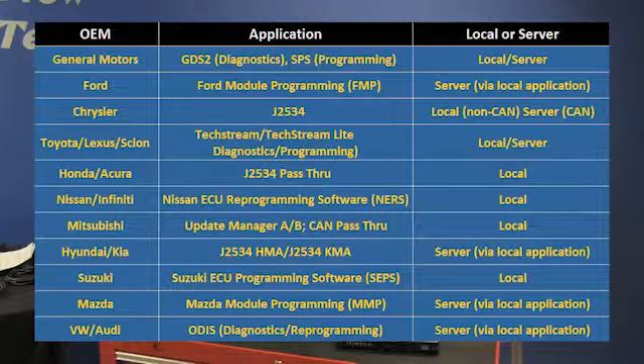So the third part of that would be the J2534 device itself. There are a number of manufacturers out there manufacturing J2534 devices. You'll want to check with the OEM websites to make sure that the device you have has been validated for that manufacturer. And the fourth component for this would be a programming power supply.

It is highly recommended you have a power supply that is specifically designed for ECU programming. The voltages on Asian and domestic cars should be between 13 and 14 volts. And these power supplies are fixed amperages because a lot of times when you're programming vehicles, cooling fans will be running or things will turn on and off. Some of the programming times can be 30 to 45 minutes. You will not have enough battery voltage without a programming power supply, and you don't want to use a battery charger because of the way they cycle.

As mentioned in a previous segment, J2534 has really been an evolution. The original implementation of J2534 was designed for powertrain control module reprogramming. The legislation and the implementation of it starts with model year 2004. So in theory, you could take an off-the-shelf J2534-1 device and using the manufacturer's programming application, reprogram any powertrain control module in the field from model year 2004 and forward. Some of the OEMs have gone backwards, so in a number of cases you can go all the way back to model year 1996.

Many of the manufacturers have now started to add additional protocols, which is where J2534-2 comes into play. The -1 standard includes all of the generic OBD2 protocols, whereas when we get into -2, the manufacturers decided to add additional protocols that were not part of that original standard. What that gives you the ability to do then is to get onto additional networks on the vehicle to be able not only to do programming, but also diagnostic scan tool access. Some examples of -2 protocols that were added would be GM's UART, single wire CAN, Honda's Diag-H. So the -2 standard continues to evolve as OEMs add protocols to that SAE definition.

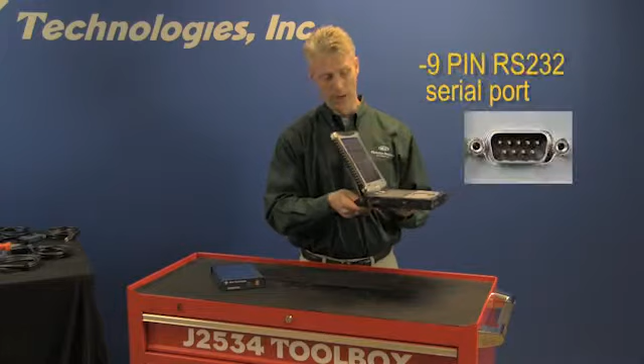I also recommend if you're going to purchase a laptop that you get one with a 9-pin serial connection. The 9-pin serial connection will be used on some of the devices like a Tech 2 if you're going to be programming older GM applications.

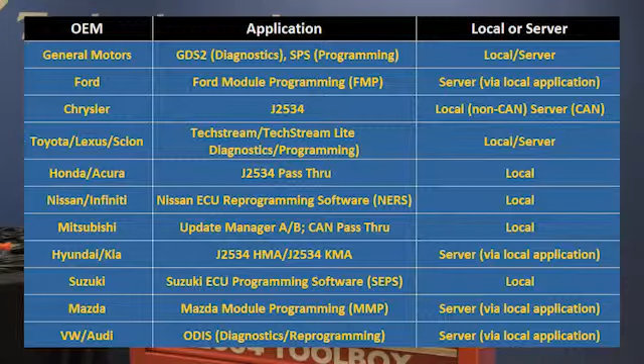So now we're going to move to software. So as you can see in the chart here, some of the software subscriptions from the OEM are server-based, and what that means is the calibration file itself is coming from the manufacturer's server, being downloaded through the internet connection, through the laptop, through the programming device, and into the vehicle. The advantage of the server-based applications is you're always getting the current versions of software.

Some of the challenges with server-based applications, and I'll use GM Service Programming as an example and Chrysler's Tech Authority website, is they're running a program called Java, and Java requirements really have you making sure that you have the latest version of Java running at all times. You'll get warning messages that you don't have the latest versions of Java, and depending what version you're using, you'll also find that sometimes the programming application won't even run because your Java version is out of date.

So when you're using the server-based applications, there are also normally some things you'll have to do on the PC side to make sure the application runs correctly. So in this example here, we have GM Service Programming site up. If we were to select the service programming icon right here, we would launch the programming application. This connects directly to GM server. The application will go through the device, pull the VIN from the vehicle, and all the communication then is a direct link through the PC, through the device, through the car.

There are many applications, however, that are not server-based, and the example I'm going to use here is Honda's pass-through software. Honda's pass-through software is a local application. Now, it's very important on Honda's application, on Nissan's application, on the local applications that you're running the latest versions. They'll always give you a version date and a version number on there.

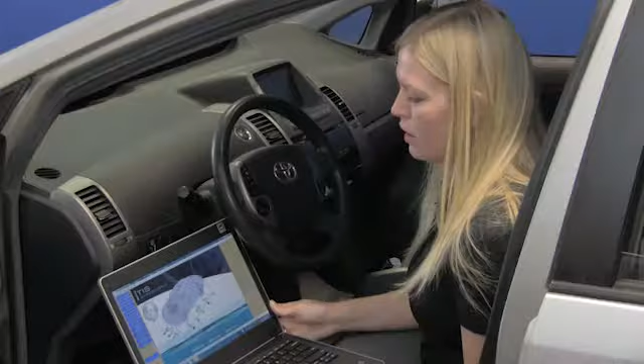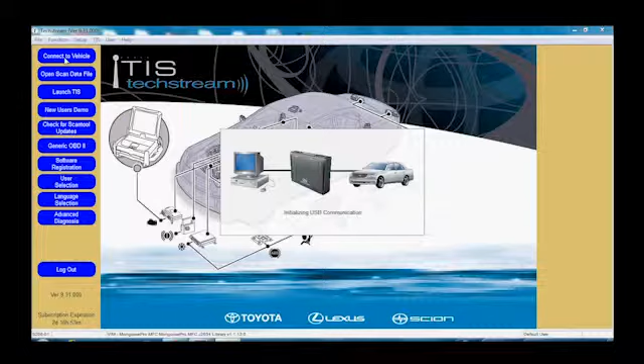Now I'll be demonstrating to you TechStream software using the TechStream Lite function. The software is the exact same on this PC as it is if you were to buy a TechStream unit itself. So what we're going to do first is connect to the vehicle. And right now, TechStream is communicating with the ECU to determine if it can communicate with the vehicle. And we can see here that it was successful in the first communication step. It has the vehicle information and the VIN number.

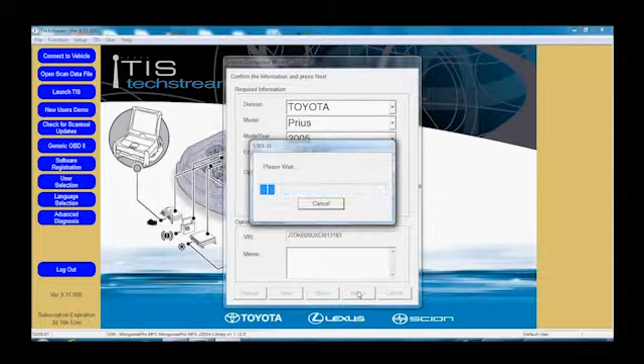It has one option that it can't determine. In this case, this vehicle has Smart Key, so we would select Smart Key, and then we'll click Next. Now, TechStream is determining all the possible ECUs for this model. We can see all the possible ECUs are here in yellow. We don't know if they're communicating or not. Their status is unknown. So in order to find that out, we'll do a health check.

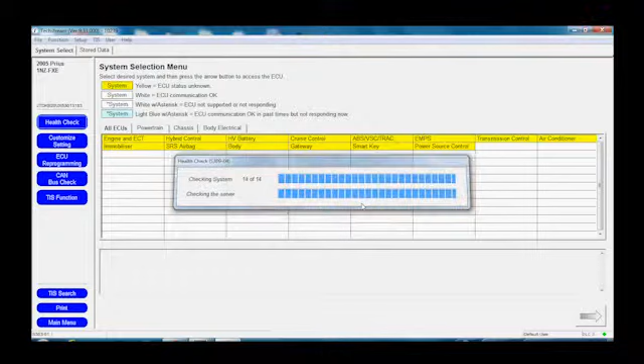TechStream is going to see which of these 14 ECUs it can try and communicate with. So our health check is complete. And here on the health check screen, we can see all of the vehicle systems. In this case, we have a couple of DTCs set in the ABS, VSC, and TRAC ECU, and in the air conditioner ECU, and we can see that they are current DTCs.

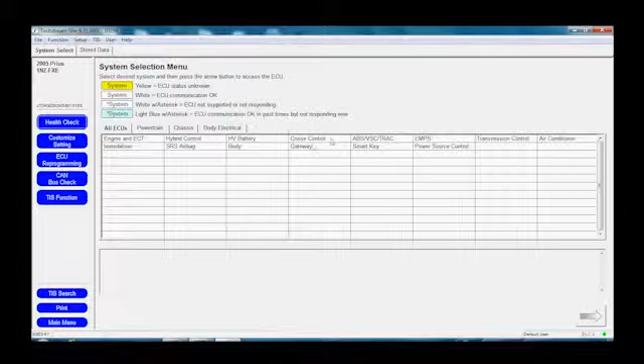We'll go back to our system select, and you can see now that there's no more yellow on any of these ECUs. This vehicle has all these ECUs and they are communicating. We can go into the engine and ECT ECU. And you can see we have no DTCs set, but there's a few functions that we can look at.

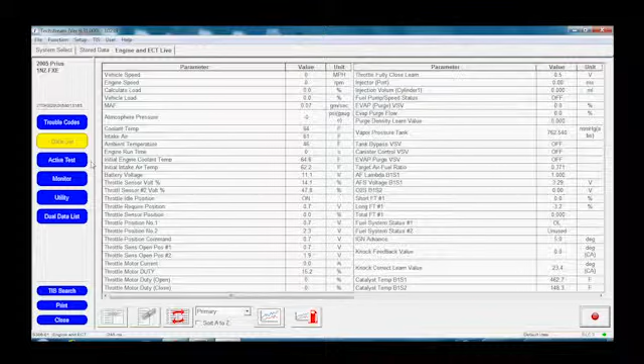We can look at the data list, which shows all of the live data of the vehicle. Vehicle speed is 0 because we're not moving anywhere. And one nice thing about TechStream is that you can go in and you can perform some active tests.

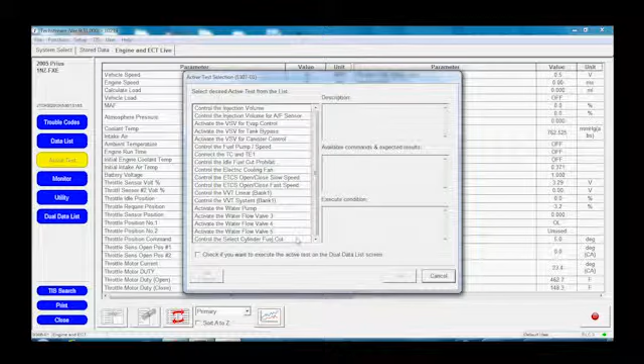From the engine and ECT, we can control the injection volume. We can control the injection volume for the air fuel sensor, activate the VSV for evap, control fuel pump speed. We can connect the TC and TE1, control idle fuel cut, activate the water pump, control the select cylinder fuel cut.

So we'll exit out of here and we'll go into the body ECU, where we can more easily demonstrate some of the functions of the active test. In the body ECU, there's the security indicator, security horn, hazard, wireless buzzer. We can open the trunk, control the front fog light relay, the headlight relay, headlight high, tail light relay, dimmer signal, illuminated entry system, vehicle horn, door lock.

If you click on one of these, it gives you the description. This test will lock or unlock all the doors. If you push lock, it locks. We'll click on the door lock function and it gives you the description that this test will lock or unlock all the doors. So in order to execute this, we have to close all the doors. So I'll go ahead and close the door. And we'll hit OK.

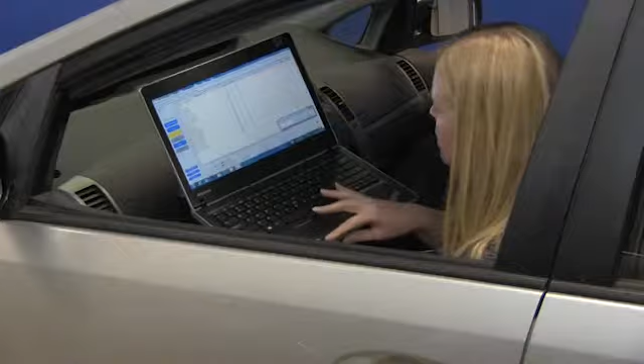And we get the little door lock screen, so off. So if we go on, the doors are locked. If we go back the other way, now to go to unlock, now the doors are unlocked. Go back to the active test. We'll open the trunk. This test will open the trunk or back door. So click, and now the trunk is open.

Next, we'll click on the hazard. This test turns the hazard lights on and off. So on. Now our hazard lights are blinking. Off. Headlight relay. This test turns the headlight relay on and off. So our headlights are off. So if we turn them on, the headlight relay, then the headlights come on.

Off. So these active tests demonstrate that when the ECU commands, for example, the hazard lights to come on, the hazard lights can come on. So it can help you diagnose whatever the customer's concern is to determine what is and is not working.

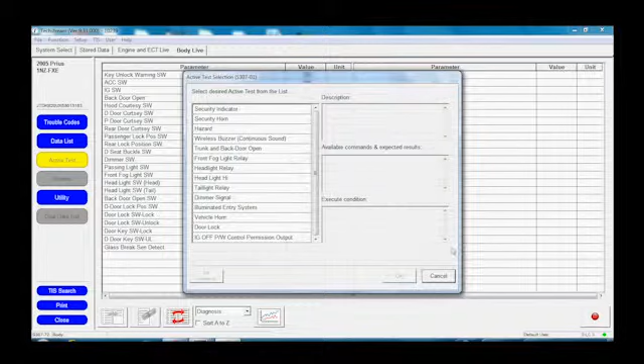Something else that's very nice about TechStream is when you have an item selected and highlighted either on the active test or your data list, or even if the vehicle has a DTC, you can click TIS keyword and it will take you to TIS and bring up the page in the repair manual. So for example, for a DTC, if you clicked it, then it would take you to the repair manual page for that DTC in TIS.

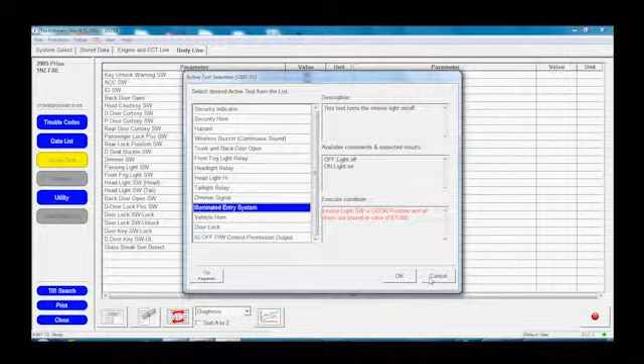So now we'll go out of the active test selection and we'll look at the different utilities that are available. So for the body ECU, we can go in using TechStream and we can customize certain features. We can customize the wireless door lock. Unlock 2 operation. So in this case, it's turned on.

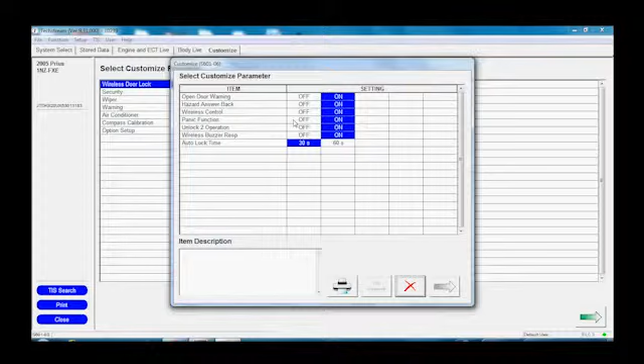So in order to unlock all the doors on your key fob, you have to click the unlock button twice. Clicking it once unlocks the driver's door and clicking it twice will unlock all the other doors. The panic function is on, so if you hit your panic button, it'll work. If we turned it to off, then it wouldn't work. And if we click, it gives an item description.

We'll go over to the ABS VSC TRAC ECU, and if we click on the utility, in some cases, the utility is required to perform some function. So for example, in order to bleed air from the brakes, we would need to use this air bleeding utility. And so if we click on it,

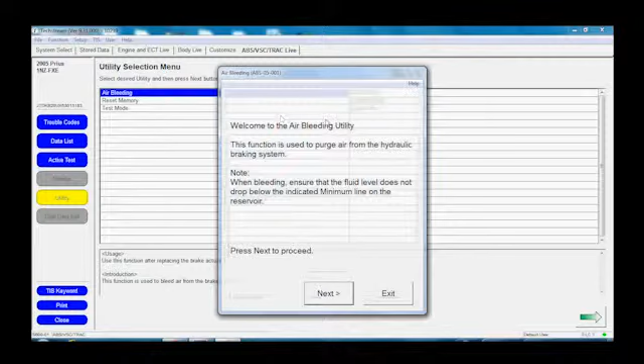it tells us that this is the air bleeding utility and it's used to purge air from the hydraulic braking system. Now if we needed to bleed the air from the brakes, we would continue through the screen prompts and it would tell us step by step what we need to do in order to perform this function.

Thank you for spending a few minutes with me as I demonstrated some of the functions of TechStream. We were barely able to scratch the surface, but as you can see, you can get dealer-level diagnostics in your shop. For more information, please visit techinfo.toyota.com.

With us now we have Bob Stewart from General Motors. Bob is Manager of Aftermarket Service and Support. Bob, thank you for coming today. Thanks for inviting us, Brian. Bob, we'd really like to see the diagnostic system that's used at GM dealerships and also what's available in the aftermarket. All right, Brian, we'll take you through both. Thank you, Bob. Thank you.

Here's the GM MDI, Multiple Diagnostic Interface Tool. It's used within GM dealers globally for service programming, Tech2Win, and Global Diagnostic System 2. If you don't have the availability of one of those devices, you can use a J2534-2 device for service programming and Global Diagnostic 2. If you want to use Tech2Win, you'll need a device that's also compliant with ISO 22900. For more information on this, please visit acdelcotds.com.

We're here at our website. If you haven't been here before, you'll need to register and create an account. We already have an account, so let me log in and show you where to go. First, you're going to get these terms and conditions that you need to agree to. From there, we're going to go to service and programming information, so I can show you all of the available options. On our left-hand side is service information, which would be your service repair manual information.

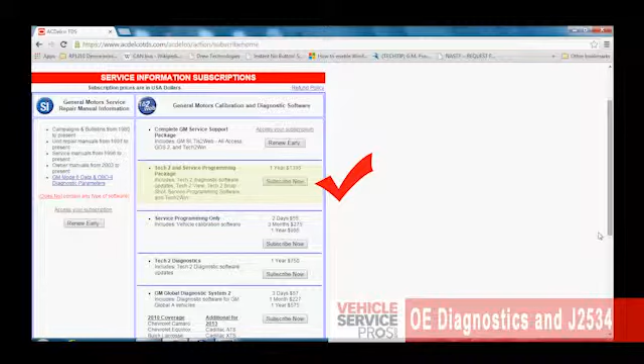And on the right, we have what we call a complete GM service support package, which is both service information and all of our service software packages. The next one down is Tech2 and service programming package, which has Tech2 software, which is also our Tech2Win software, emulated on a Windows PC, and it has service programming for updating modules on vehicles. Then you can go to the service programming only, which comes in 3 different time lengths: a 2-day, a 3-month, and a 1 year.

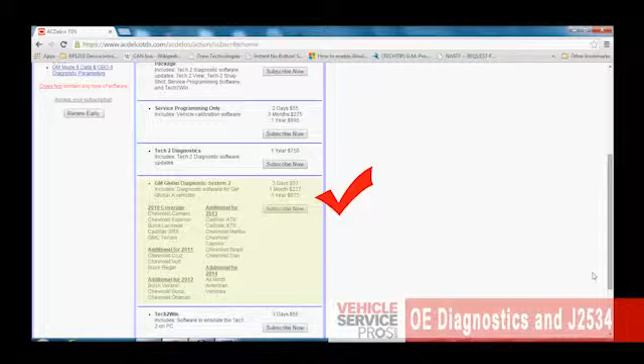And then we have Tech 2 diagnostics, which is nothing more than Tech 2 software updates. And then we have Global Diagnostics 2, which has 3 options of lengths: a 3-day, a 1-month, and a 1 year. But also you need to check the vehicles that are covered, which are here on the screen. Starting in model year 2014, all North American vehicles are covered by Global Diagnostic 2. From there we have Tech 2 Win, which is only available in a 3-day access, Windows emulated.

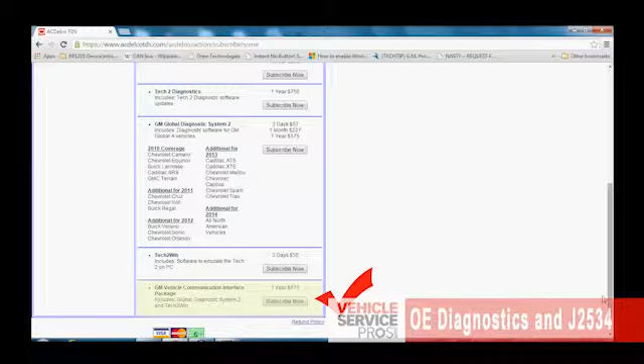And then at the bottom we have what we call a vehicle communication interface package, which you'd use with a J2534 device or the GM MDI to run both Tech 2 Win and GDS2. But keep in mind that for Tech 2 Win, you need to have an ISO 22900 compliant device. All right, let's take a look at Global Diagnostics 2.

From here you click on the globe in the upper left-hand corner and it auto detects the vehicle. We happen to be in a GMC Yukon 2014 model year here. From there, let's click Enter. Let's go to Vehicle Diagnostics. Let's read vehicle-wide DTCs and ID information. This is going to take a little bit of time because it's going to ping each module to see if it's online and to check the status of the module. As you'll see, this is a long list and it has a scroll, so the list is beyond the length of the screen.

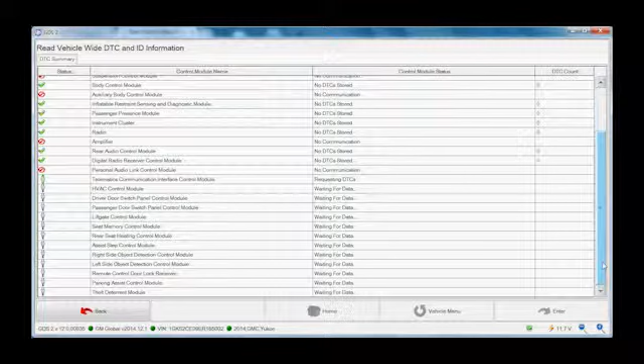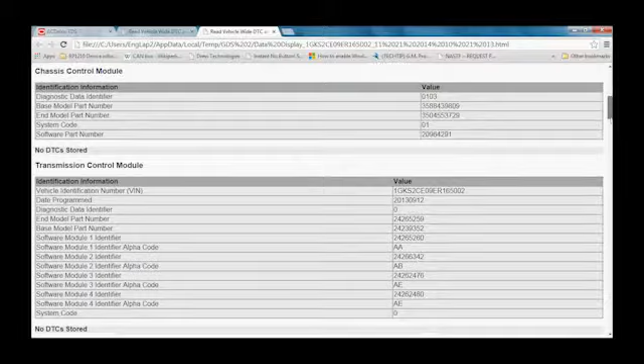And once that's complete, it comes up with a full report of the vehicle DTC and ID information and the status. As you'll see, we have the VIN number, all the different modules listed and whether they have DTCs or not, and the identifiers, the 8-digit number for each module listed that's available on this vehicle.

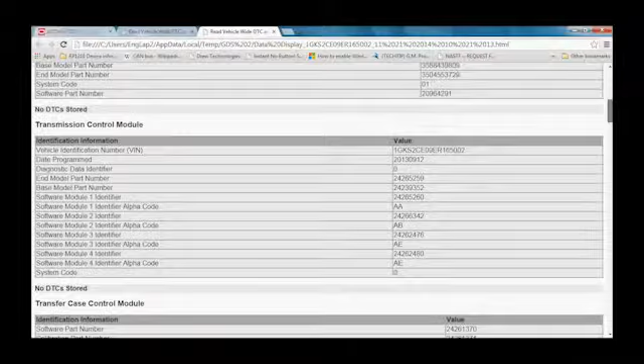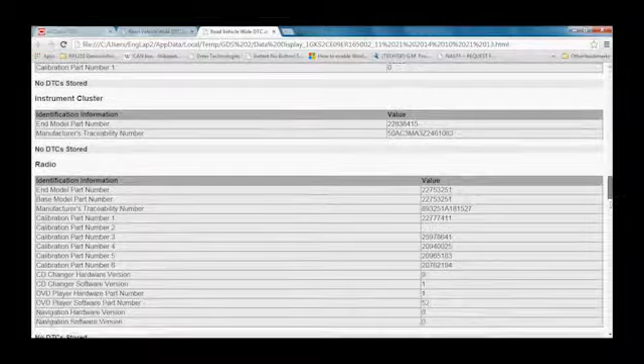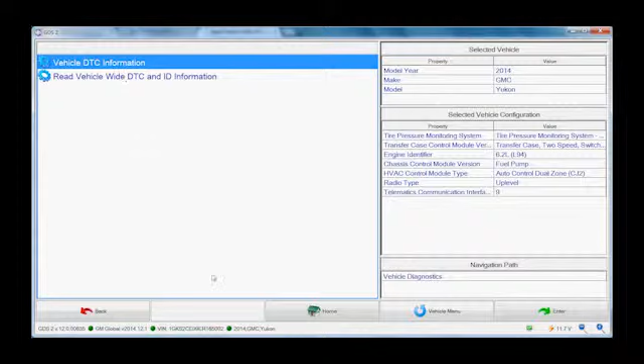From there, let's go back to the beginning and show you some of the bidirectional control that the software has the ability to do. We'll click the Home. Go back into the diagnostic software, which will identify the vehicle again. Go back into Vehicle Diagnostics. Oops, I went in the wrong place. Go to Module Diagnostics, and let's pick the instrument cluster. From here, you can read the DTCs, you can get the module information, you can get a data display. Let's take a look at the data display.

So it shows the instrument cluster, the battery voltage, the brake fluid level switch status, driver information center, fuel information switch, driver information center switch, ignition switch status, passenger seatbelt indicator commanded, passenger seatbelt reminder indicator enable status, washer fluid level, reset switch, and the trip fuel switch status.

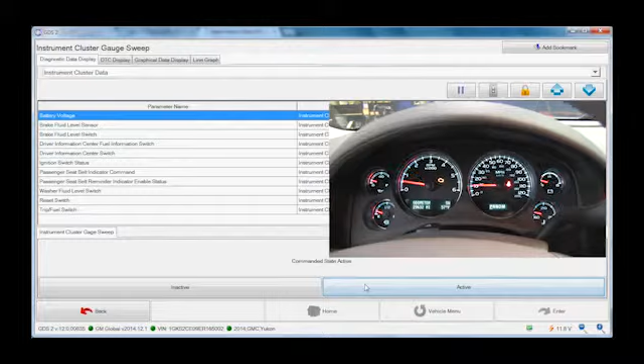Let's go into the functional control. We can take here the instrument cluster gauge sweep. We have 2 choices down here, inactive or active, but we'll choose active, which is sweeping all the needles on the instrument cluster here, to check the gauges for proper operation. All right, I'm going to go and actuate something else now. Back into module diagnostics.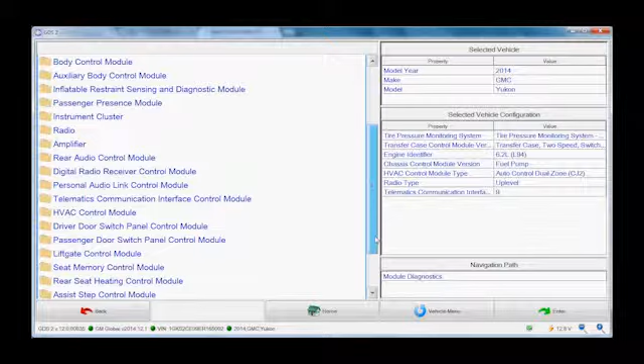Go into the seat memory module and the function control list. And I'm going to move the seat that I'm in from the scan tool. You can move it and test it in both directions for the full movement of the seat. All right, I'm going to go and actuate something else now.

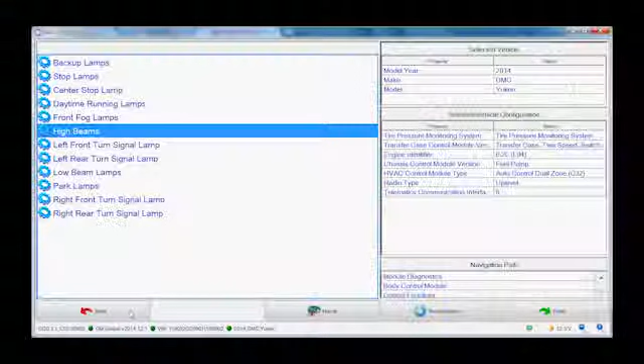Back into module diagnostics. I can select the exterior lighting. Select the headlights, turn the headlights on and off. We can look at many other lights, including the backup lights, the stop lights, the high mount center brake light in the back, the daytime running lights, the fog lights, the turn signals, the parking lights. You can do both right and left, front and rear.

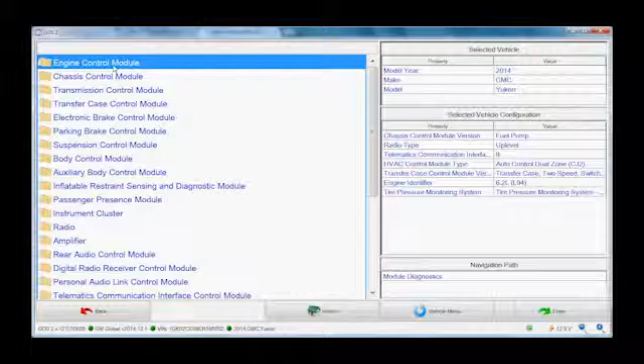Here we can take a look at the engine control module and look at all the data available on the engine control. Quite extensive list of all of the different sensor values within the engine control. We can also do the same thing we did with some of the other modules and go into the control functions, such as the cooling fan.

All right, so there's a small sample of the capabilities of GDS2, which gives you full dealer functionality for diagnostic software, which you can use either a J2534 device or the GM-MDI.

Today we have Kurt Emicus with us from Volkswagen. Hello, Kurt. Hi, Brian. Kurt is in charge of all things aftermarket within Volkswagen Service. Today, the big question on everybody's mind, Kurt, is in the aftermarket, what does a technician have access to for the diagnostic system? So Kurt, if you could give us a tour of the OE diagnostic system, that would be excellent. Sure, Brian.

This is our factory tool. It's a VAS 6150C. It's a Panasonic Toughbook, a CF53 model with some internal hardware changes to make it more ruggedized. It's got a solid state hard drive and some other things. The interface is called a VAS 5054A. It's a wireless interface, but it also has accommodation for a wired cable, an Ethernet cable. We recommend that for any reprogramming or immobilizer events that you're doing, simply for security's sake.

These are available from Snap-on Business Solutions through our ErWin website. If you go onto the Tools section, there is a description of how to order one of those. If you don't want to use the factory tool, it works also on a standard laptop with a J2534 interface device, and it works just fine. The software is available on our ErWin website for both units. This is our ErWin homepage. It's our service information site for Volkswagen.

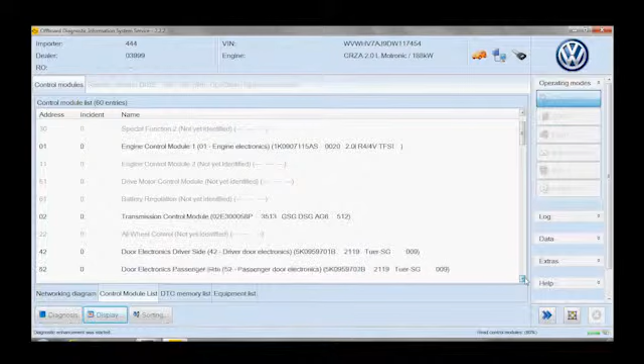And now what it'll start to do is actually do a list of control modules that are on the car. So right now it's doing that function. It's actually checking to see what control modules are here. There we go. Now it's starting to fill those in. First one you see is the engine control module. And it'll run through all the ones that could possibly be on the car and identify the ones that are there. The ones that are grayed out are ones that are not on the vehicle, or maybe not even communicating. Now you can start to see the list start to build.

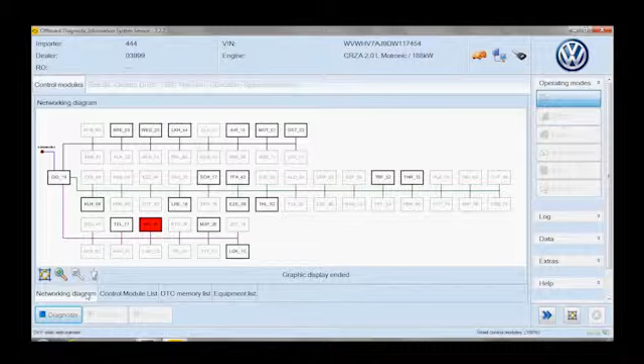There's another way to look at this. If you don't want the list version, which I like, is the network diagram. Now this divides it up by the different protocols on the car. The ones that are highlighted in red are the ones that have a DTC associated with them. So here's the whole module diagram.

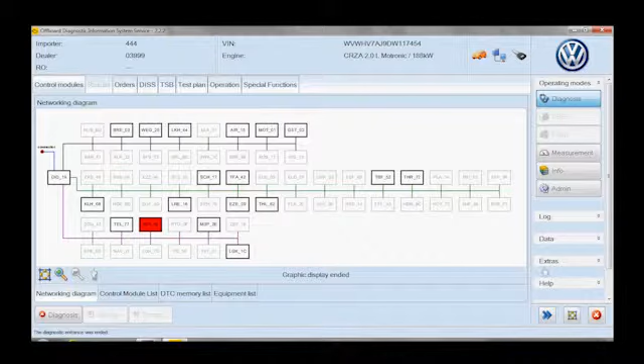Some of the other things you can do, if you go over here to Extras and click on that button on the right side, here's where you see a list of different functions. Diagnostic interface. This is where, if you had a J2534 device, you would select that. Change VCI. Tells you where to do that.

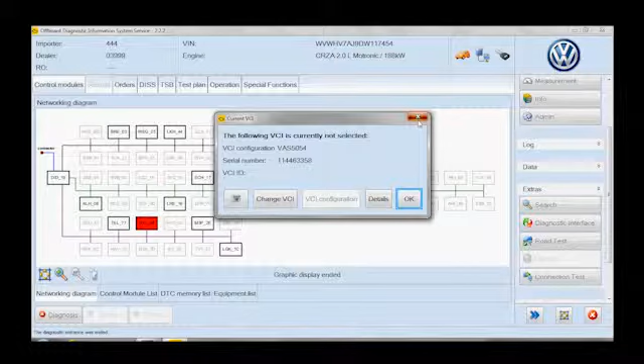Okay. The other thing you have here is road test mode. If you are connected to the internet and you want to take this out on the road and road test the car, you activate road test mode, which allows you then to disconnect from the internet. Then when you come back from the road test, you click out of road test mode and it takes you right back to where you were before.

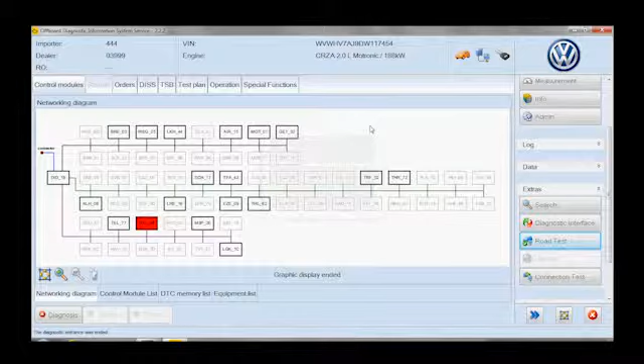Then another interesting thing to look at is the help screen. Let me get to that piece. Wherever you are on ODIS, if you click on help, there is a help screen. It's a big PDF of 512 pages, and you can go to exactly the place that you're looking at within ODIS. That's it. So now we've run the health check.

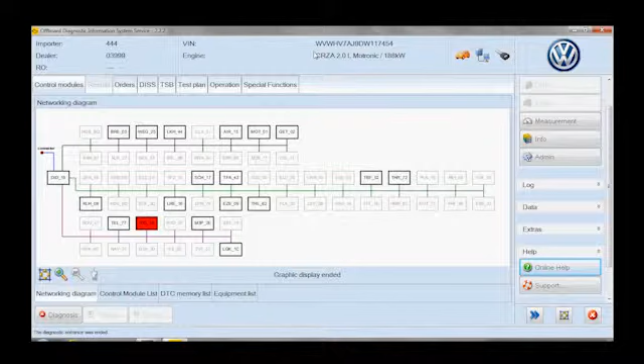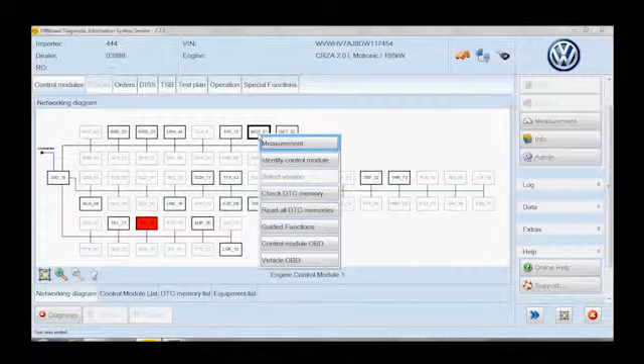Can we see like a live data list? Yeah, let's see if I can find that. Now what we have here is a diagram of all the modules that are on the car, and they're laid out by the protocols. Okay, what we're going to do next is go to the engine control module and read data. We double click on the module, guided functions, and then we're going to go reading measured values, engine, perform. Okay. This we're going to continue.

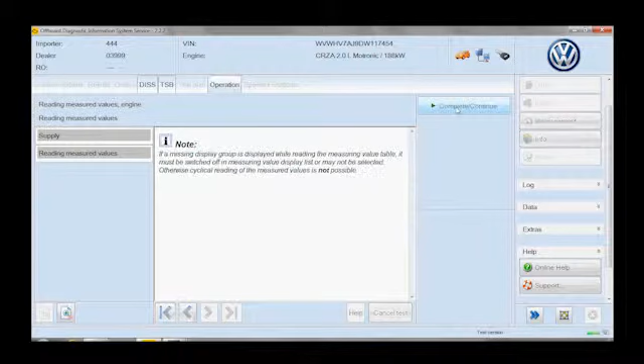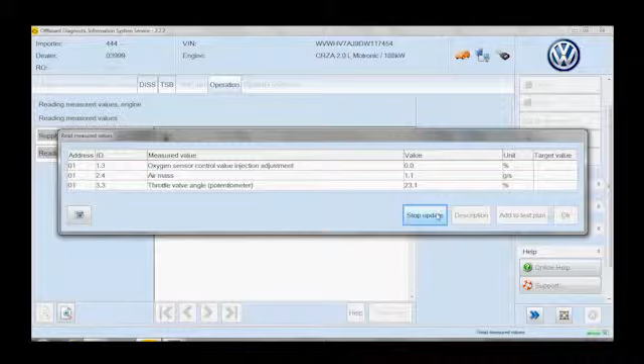There we go. Now you're seeing all the different values available, and you can select them. Click on OK. All right, now you're going to see values that change. Yeah, now we're showing some voltage changes. Throttle angle, we're at 92%, back down, and so forth. We could start the car up, and then the mass airflow and the oxygen sensor values would also change.

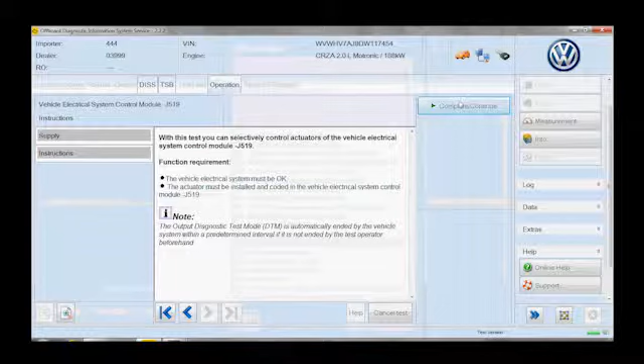All right, we're back to the list of modules on the car, and we're going to test the operation of the windshield wipers. So they're in the central electrics module. Right click on that, go to guided functions, and we're going to go to output DTM, perform. There's the usual warnings. Click on that. Go to number 3, which is windshield wiper washer system, on the right side there.

Okay. Go to number 2, which is wiper. Now it tells you to make sure that the hood is closed. Okay. Now we're going to start the test. There we go. All right, that'll just continue running till we cancel the test. It takes a second for it to shut off.

There we are. I know we just scratched the surface on what this tool can do, but it's the exact same tool that's used by the dealers. You can use it with our factory scan tool, or you can use it with a standard laptop and a J2534 device. It covers all the Volkswagen AG brands, including Volkswagen, Audi, Bentley, Lamborghini, and Bugatti if you happen to have one. So thank you very much.